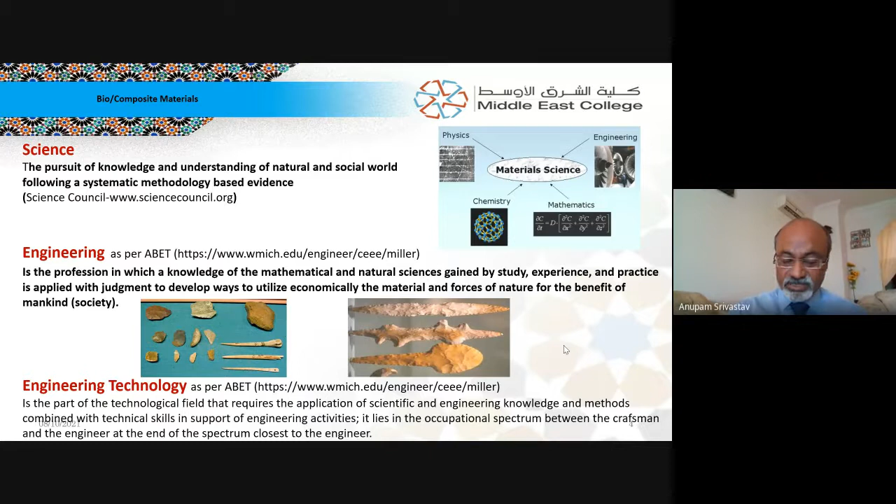So what makes us distinct from other disciplines of engineering, particularly the new ones, is that for us, science is as important as for them, but for us, our own skills are important. So if we just know the theory, we are excellent mathematicians, modelers, but if we don't have the skill, the art, then we are failing as engineers. So with this caution, let's move and see what is the material world.

So we are all knowing, all of you are teaching, and some of you are quite senior, so I don't have to elaborate on this, but just broadly classifying the materials as metals and non-metals, and then various categories among metals as pure metals, alloys, and in non-metals, inorganic and organic, and then combination of each of them, which brings us to the current area of novel materials, which are specially fashioned or designed materials. Composites are one of the examples of that.

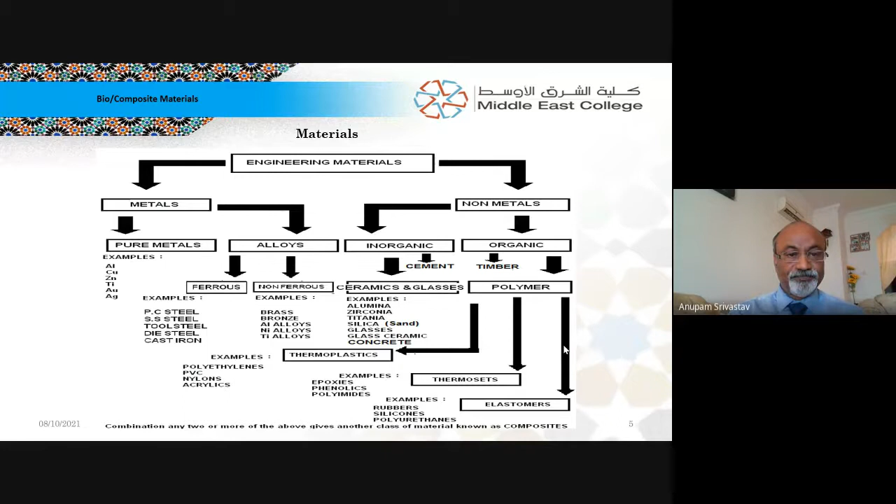So what is the novelty in materials? What is this novel material? As you all know, materials have been so important over a period of time; since humankind stepped on this earth, the importance of material was felt, and the eras of our civilizations have been named on metals. All of us know the Stone Age, where the material used was the stone.

Bronze Age, primarily the bronze category of materials was used, and then the Iron Age, which really transformed human civilization. Steels are part of that, but now even that has gone, and the current times we are living in is the age of silicon. All the electronic devices, solar cells, whatever you think of has something to do with silicon. And to a certain extent, it is either taken over by polymers or going side by side. So we can call it a polymer age, silicon age, or dual age of polymer and silicon.

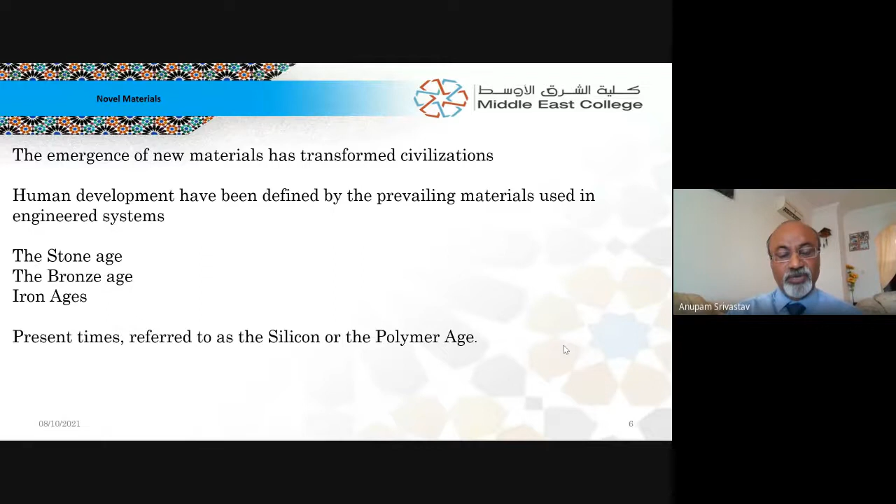So when we see the novel materials, understanding the structure and composition as well as the properties has led to remarkable progress in the area of material science, where properties of materials such as strength-to-density ratio, corrosion, or heat resistance have resulted in a variety of new products. Some of you might have experienced it personally. Some of you might have heard it from your relatives, neighbors, known people.

Orthopedic devices, for example, implants, total hip replacement. Now we can replace the entire hip of the human body with artificial material. Dental is very common. In fact, India is known for dental implants since ages. Cardiac materials, pacemakers, stents, etc. Heat shields of all varieties, all kinds, including in electronic devices as well as on spaceships. Then some of the health and safety instruments like helmets, some of the games and related.

Earlier, the material used for a cricket bat was not that advanced, and that's why scoring a century in a one day game was unthinkable. Now people are scoring 100 in 20 over games. They are scoring 200, 300. All the credit goes to these novel materials or the way those materials are shaped. Tennis rackets are also one example of that.

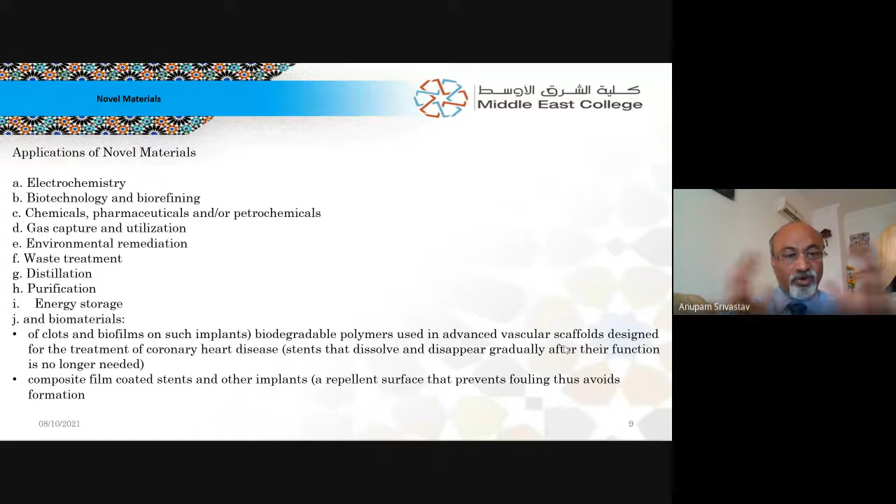So it's a broader family of materials, under which you have heard about smart materials, you would have heard about functional materials, shape memory alloys, etc. All that comes under this broader category of novel materials.

So coming to the topic of biomaterials, as the name indicates, it's a material which is developed or which is being used as a non-viable material in medical devices which are intended to interact with biological systems for the purpose of improving human health. What does that mean? It means any material which is having some strength and which is to supplement the existing structural or other elements

of the human body. So medicines which we consume, technically speaking, don't come under biomaterials, although they go inside the human body, but they are not intended to supplement any existing organ or other skeletal functions. So that's why the drugs used for medicine are not classified or categorized under biomaterials. It is more to do with mechanical, heat, flow related applications in the human body.

So because of that, the non-viable word has been removed now, because non-viable means without which we can't do anything. So this change in the new definition has come because tissue engineered scaffolds and hybrid prosthetics have been developed, in which living cells are combined with non-organic material.

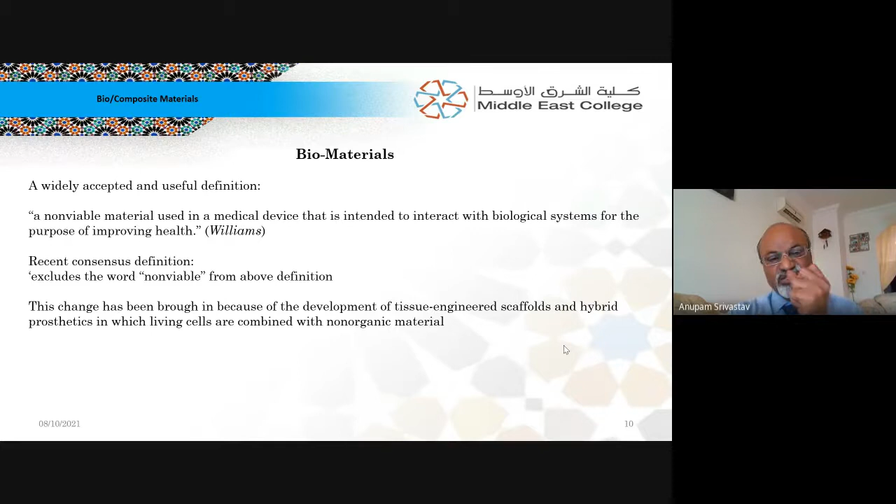Earlier scaffolds had to be removed, but now they are made so close to the human body in terms of characteristics and chemical structure that even if they are retained there, the body accepts it as original. Sometimes it dissolves it, sometimes just leaves it there, knowing that it is not going to harm. So that is how biomaterials have progressed.

So finally, what has led to all these developments is the refinement in the definition itself, which is a material intended to interface with the biological system to evaluate, treat, augment, or replace any tissue, organ, or function of the body. So a complete liver can be replaced, a complete heart is replaced by an artificial heart. So the material which is used for that artificial heart is a biomaterial.

Or a bone has fractured and a material is put there to augment the strength of the bone or support the bone, and it is removed once the bone is healed; that is also a biomaterial. So there are non-viable biomaterials and viable biomaterials. How do we classify the biomaterials?

Since it is going inside the body, and from some of the hints I've given on how it behaves with the human system, they can be biotolerant. That means they're not very close to the physiological conditions of the body. They are not toxic as such, but the body just tolerates them. So in such a case, what happens? The implants get separated from the adjacent area, generally in the case of bone, by a soft tissue layer along most of the interface.

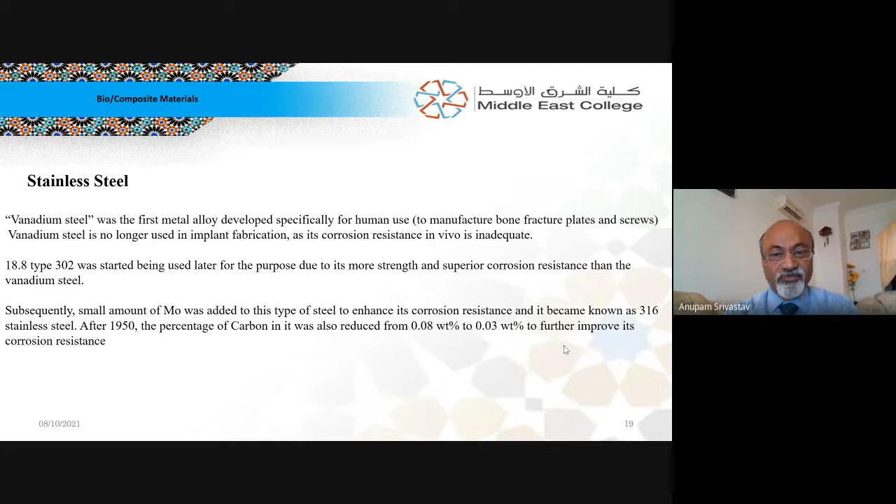Still, it needed further novelty, further improvement in properties, and therefore 316L stainless steel was finally developed, which had some more alloying elements. Now, currently, what is in use in market since 1950s is 316L stainless steel, which has carbon percentage only up to 0.03%. Manganese is 2%. Phosphorus is again similar to carbon, and so on.

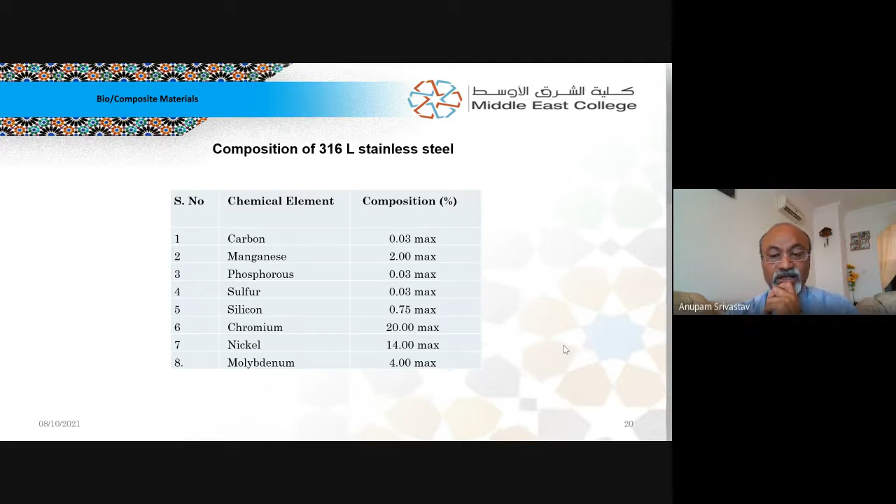If you see, the highest is chromium, and the next is nickel. So nickel and chromium are dominant alloying elements, whereas molybdenum and manganese are minor alloying elements, and rest all are trace alloying elements. So what is advantage of 316L stainless steel compared to the previous two generations of this steel is that it has quite high mechanical property strength. As you can see, I need not explain.

But since time is not there, I'm not going to go for question answer session as such now, but I'm posing a question. Do you think that high strength is good or low strength is good? So here, this 316L stainless steel has approximately 10 times more strength, Young's modulus, than bone, for which it is going to be implanted. So it is going to be implanted to support the bone. And the strength of this material is very, very high, 10 times higher.

So what happens then? It happens what we do for the school, our children, or in the colleges when we teach. If we support the student too much, spoon feeding too much, that student gets dependent on the teacher, or that child gets dependent on the parent. Same thing happens in the human body. If the bone gets supported too much, then it forgets to carry the load. And with time, bone resorption happens. Bone starts losing its load carrying capacity because it starts discarding the calcium present in the bone.

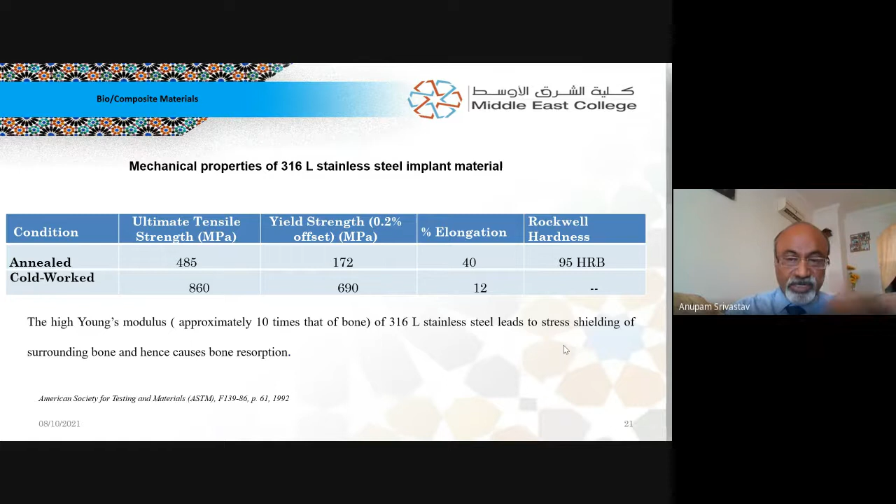Second broader category is titanium alloys. They are being used from quite long time, as it is seen here, 1930s onwards. They are used because they are lightweight compared to the steels, and they have very good mechanico-chemical properties. So that means mechanical properties are also very good, and chemical properties, particularly the corrosion resistance and biotoxicity, etc., is quite good. And there are variety of categories of titanium alloys.

Generally 4 grades are there: unalloyed pure titanium, and then various impurities or alloying elements are added, which are used for all surgical purposes. The amount of oxygen in particular affects the ductility. So if we increase the amount, ductility goes down. If we decrease it, ductility goes up. So depending upon what is the type of application, we increase or decrease the amount of oxygen also here, which was not the case in case of 316L stainless steel.

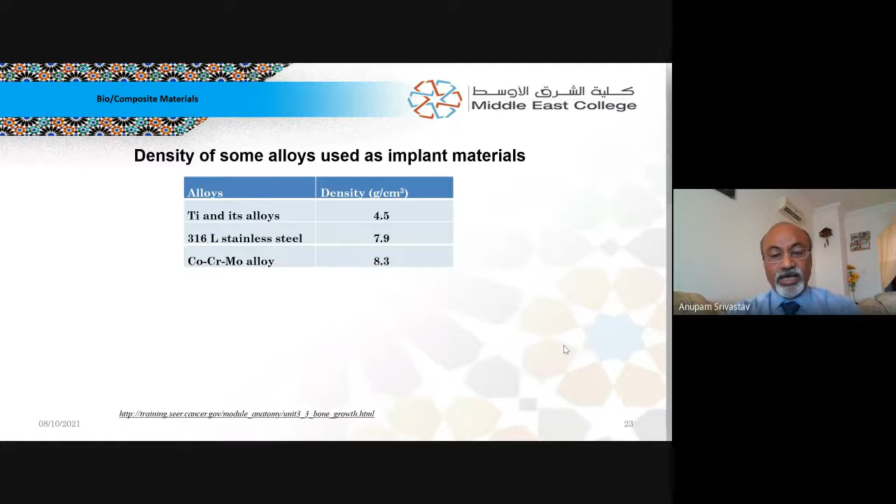And you again see the properties. Again, it is quite high. If you compare with steel, which was 7.9 density wise, it is quite lightweight. And then if you compare other properties also, you will find that it is more suitable for majority of applications compared to the other 2 categories.

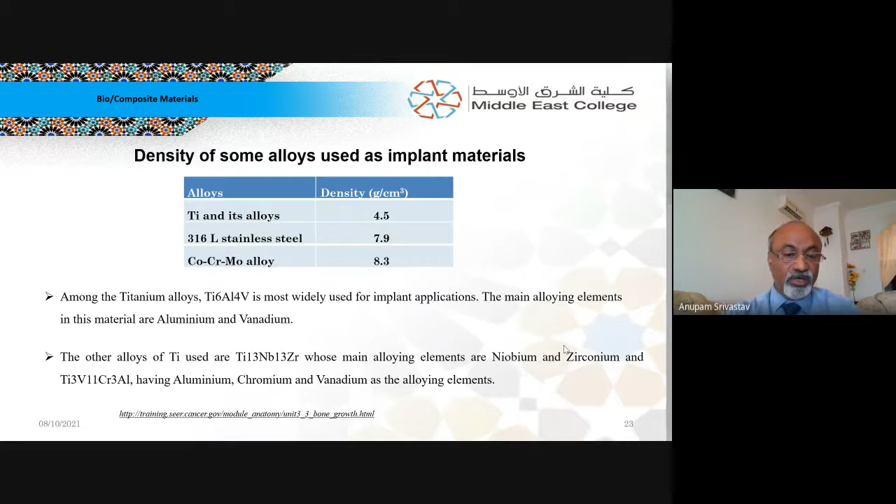And uses, as I said, are quite varied depending upon which alloying element is being used. Niobium, zirconium, aluminium, chromium, etc. are used, and different categories or families of titanium alloys are prepared to be used as implant material. These are some of the alloying elements, and with that alloying element, the grades are made. And the most commonly used one is the last one, Ti6Al4V alloy. More than 90% of titanium alloy used in current times is of this category, which is in the last column.

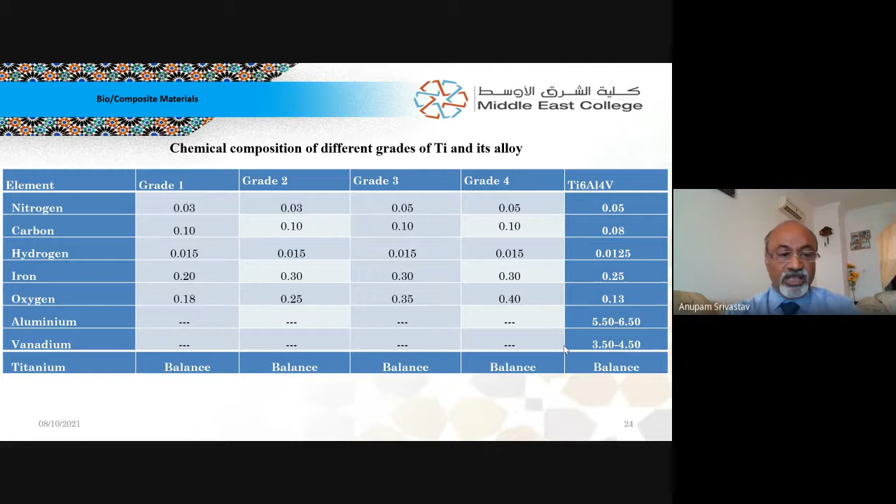Mechanical properties, as I was mentioning, again, it has very good mechanical properties, and it depends where it is going to be used. So sometimes these very high mechanical properties are useful, and sometimes they are not useful.

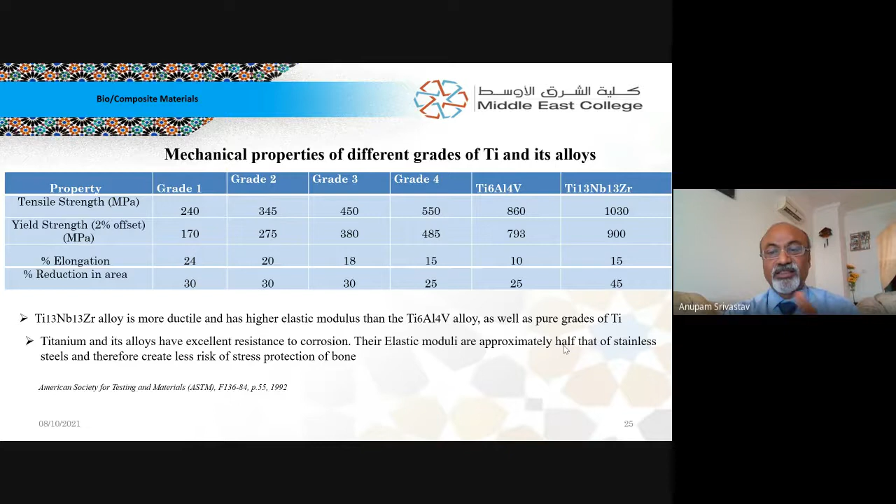Okay. Just a point that titanium and its alloys have excellent resistance, as I mentioned. Their elastic moduli are approximately half of the stainless steel and therefore create less risk of stress protection in bone. What I was mentioning in 316L stainless steel, that it has higher modulus and therefore it actually spoils the bone. Whereas here it has half of stainless steel, so it spoils but spoils lesser. So the novelty in this category is that it is supporting the bone more compared to the stainless steel.

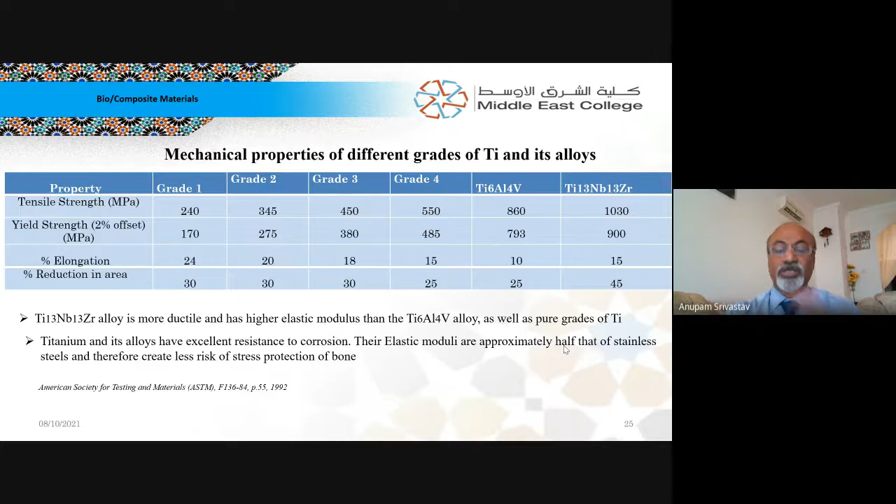And then comes the cobalt chromium category. I'll not go into detail. It has variety, but primarily there are two categories. One is the castable one, and the other one is the forged category. And based on whether it is cast or forged, where it is going to be used is decided, because if the shape of that implant is very, very intricate, then casting is preferred. But if the shape is straightforward like a bone plate, etc., then it can be forged. As you all know, in mechanical engineering, how do we decide which manufacturing method has to be used?

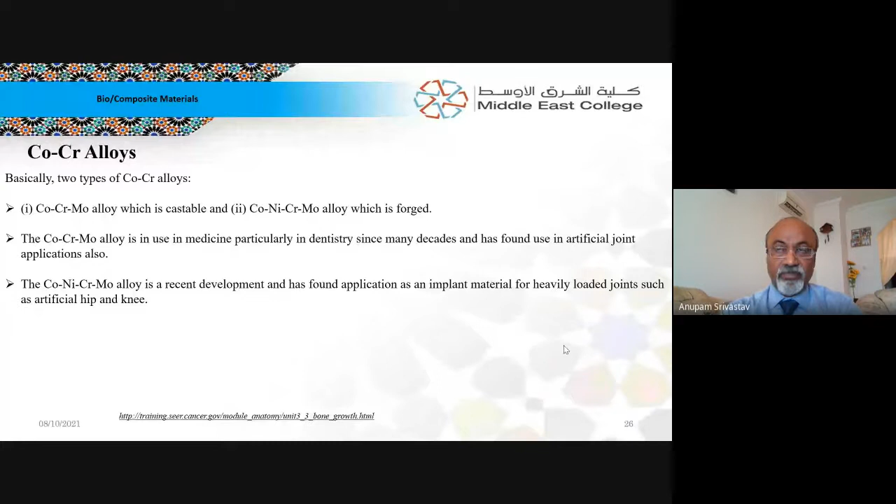And it is primarily initially used in dentistry, but now is also being used in artificial joints. So total hip replacement, total knee replacement, etc. And it is being used because it can carry the load. And the artificial hip is the main area where most of the load of the human body is being shared, so it is being used even there.

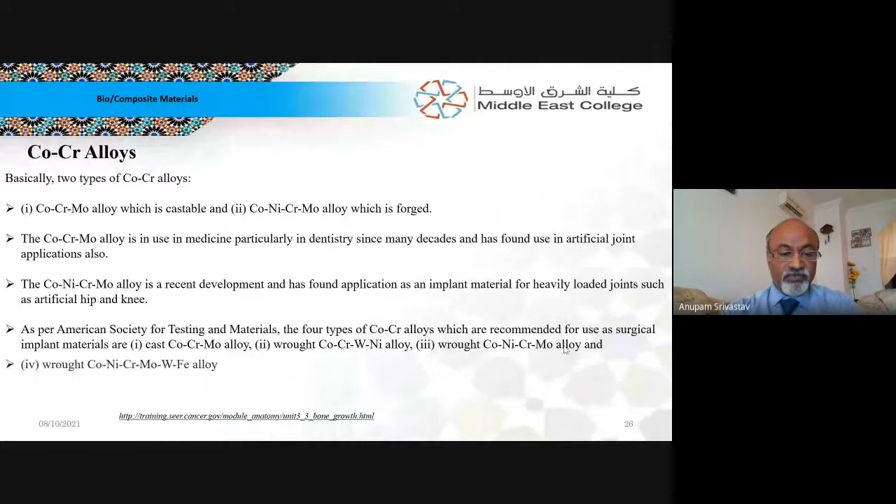And coming back to the corrosion resistance, as I had shown earlier, it has the highest corrosion resistance compared to all the three. And even among the cobalt chromium, the two categories, the one which has nickel in it has higher corrosion resistance, and that's why one of them is not preferred over the other. In general, wherever there is friction or where two parts are to move, it is not preferred, such as the bearing areas, because frictional properties are not very good.

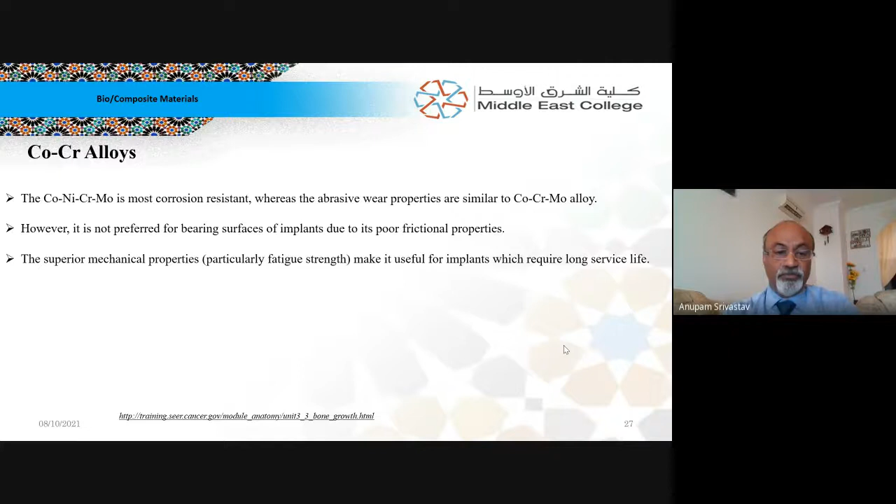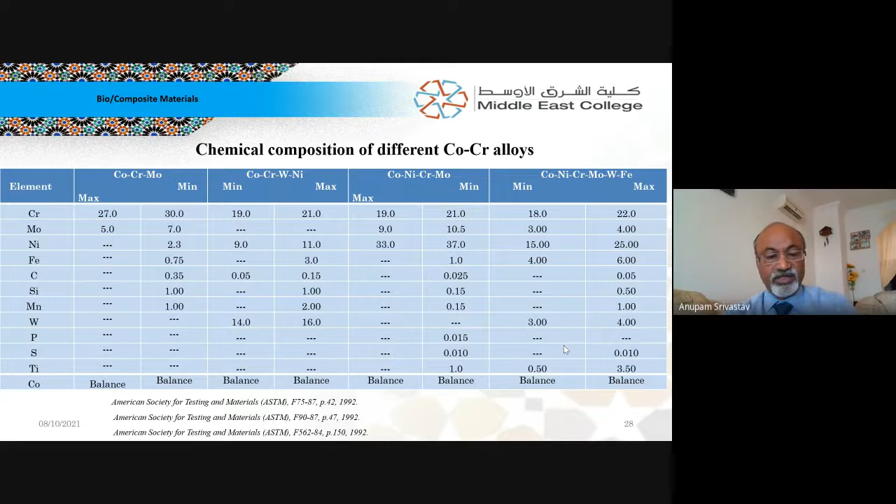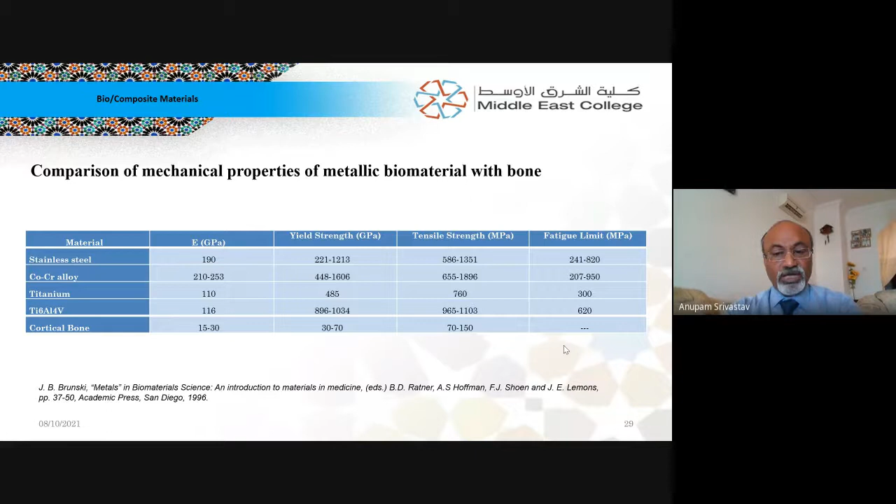Just for your brief look, these are the alloying elements, and based on their alloying elements, the various categories are decided. So if we see the comparison between stainless steel, cobalt chromium, titanium pure and titanium alloy and the bone, you can see the bone yield strength is 30 to 70 gigapascal, whereas all these materials are 4 times, 5 times, 6 times higher. Modulus of elasticity also is in the same range, tensile strength in the same range, fatigue limit also the same range. So which one to be selected among these metallic materials all depends on where exactly we are going to use it, and if that purpose is to be served for a long time or a short period. So this is already mentioned.

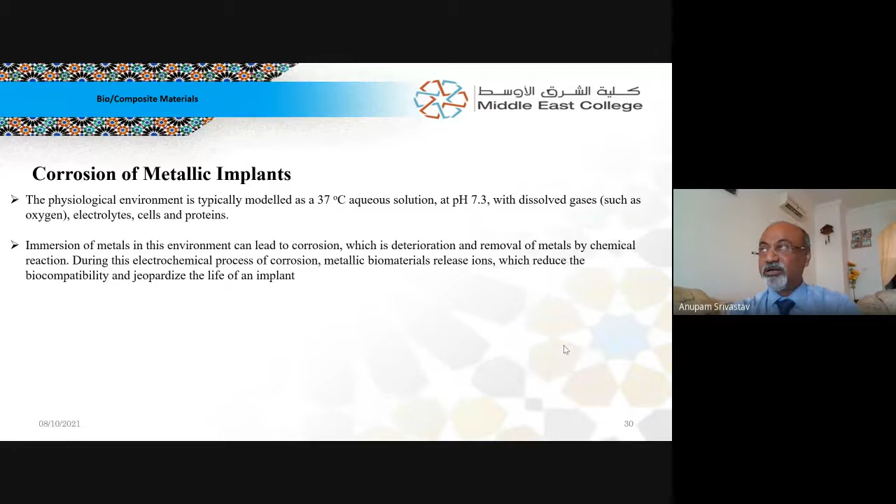Just to let you know the pH value, the human body pH value is 7.3. We cannot play with this. Temperature we still can manage, but if the pH value goes up and down, it has a catastrophic effect on all the organs in the body. So when the implants are implanted in the body, we have to know that it has not only this pH and the temperature, the body also has dissolved gases, and then it should not let the formation of an electrolytic cell, electric cell formation, and playing with the protein of the body.

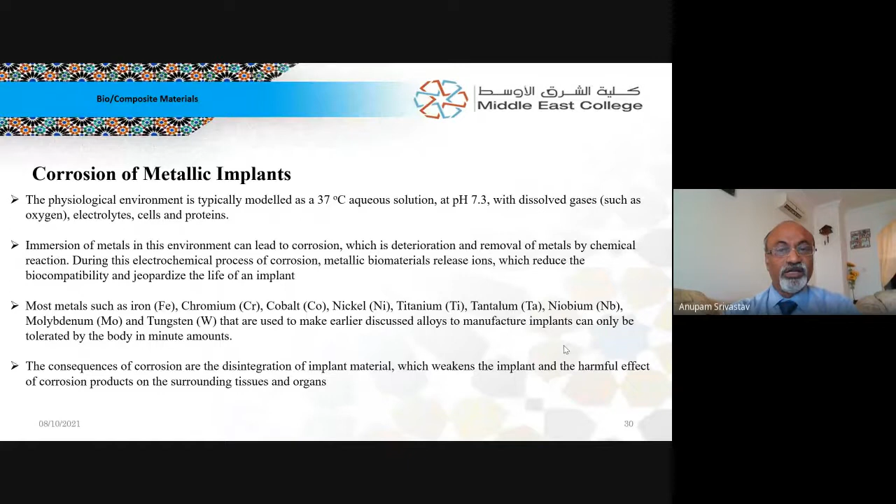So with these problems in general, load bearing problems, corrosion problems, cost, fabrication, etc., that is why it was thought that let us look at some other category of materials, and that was the time when we thought of further novelty in the biomaterial. Just to give you a glimpse of what happens when a metal is implanted, this is based on my own research. This was implanted in an accident case where bone was fractured in multiple places.

And what would have happened to the corrosion product? The corrosion product is more toxic than the parent material, and it would have gone in the surrounding tissues, and it would have created adverse reaction, itching, swelling, and sometimes loosening also. And then it had to be removed.

So this was removed by the doctor, and we had investigated what was the cause of removal, why this implant failed in this patient. It was this: for this particular patient, it was not acceptable by the body, and that's why it reacted earlier than in normal other patients.

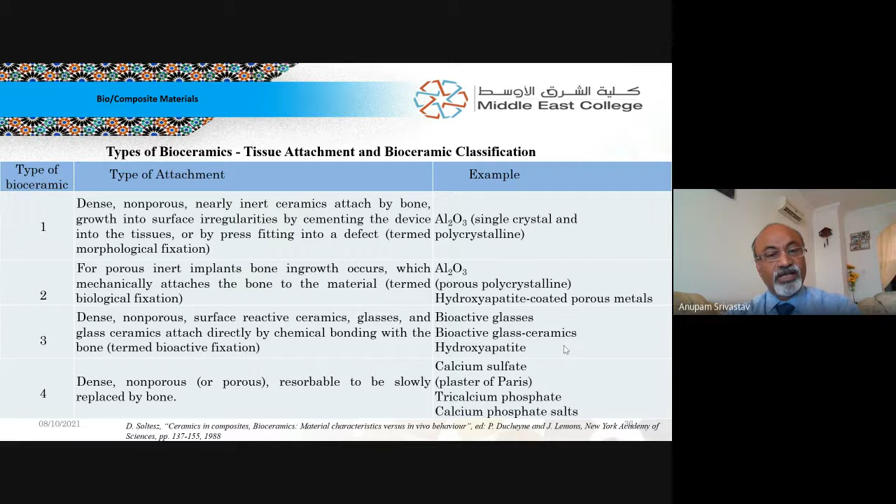You must have heard about plaster of Paris, which is used for external support to the bone damage, means fractures. That's also a category of bioceramic, which is used externally. In certain cases, it is also used for short duration inside as well. So this is how types of biomaterial, bioceramics are categorized, and their different attachment mechanisms are listed here.

Let's go to the main category. So among all bioceramics, the largest group of bioceramics are calcium phosphate group of bioceramics. Why? Because they are calcium based, and our bone is calcium based, and they are as close as possible among all category to the human bone. So because they are close to the human bone in all sense, therefore they are the most acceptable part.

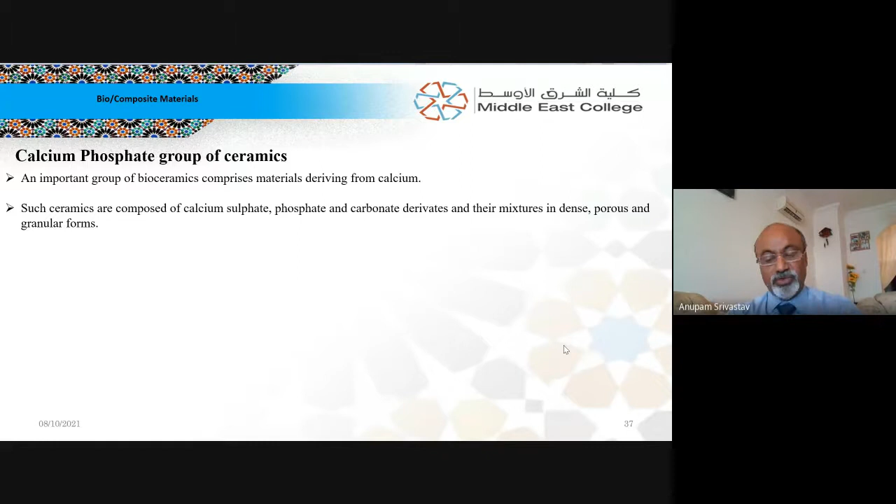They do lack mechanical strength though, so they cannot be used as such in applications where you have shock loading. So they cannot be used as a raw form of bioceramic for, say, total hip replacement, because if hip is totally made of ceramic and we fall, then it will shatter into pieces rather than having a fracture here and there. So we must do something to bring novelty to this category of material, and we'll see how it is done. So we'll see some of those things for calcium phosphate.

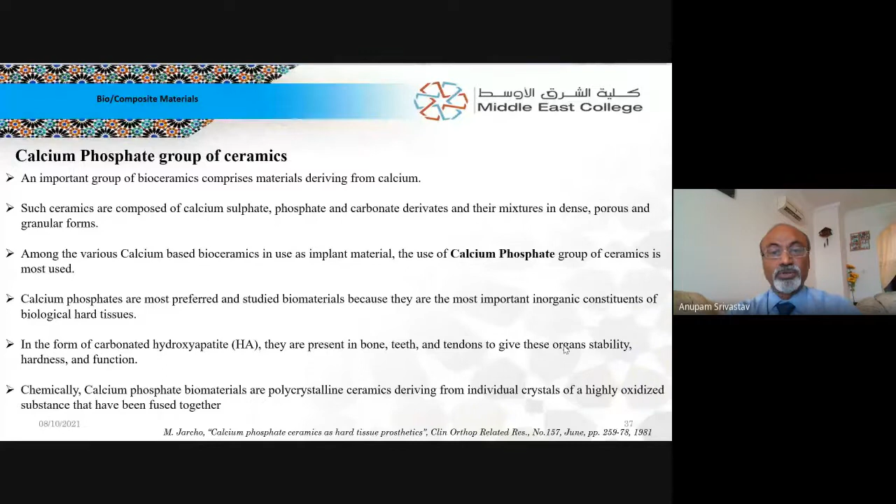One of the most important categories of that is hydroxyapatite. Hydroxyapatite is nothing but a polycrystalline ceramic which is derived from natural sources. It is artificially made, as well as derived from animal sources, bone crushing. The upper side, the harder part of the bone, is hydroxyapatite, or tooth enamel. It is very close to hydroxyapatite.

So this calcium phosphate is, as I said, biocompatible. That means they are totally accepted by the body, or bioresorbable. That means they are inside the body, and when the purpose is served, they are absorbed by the body, and extra material is excreted out from the body. So there is nothing better than this. If any material can be resorbable, that is the novelty we are looking for.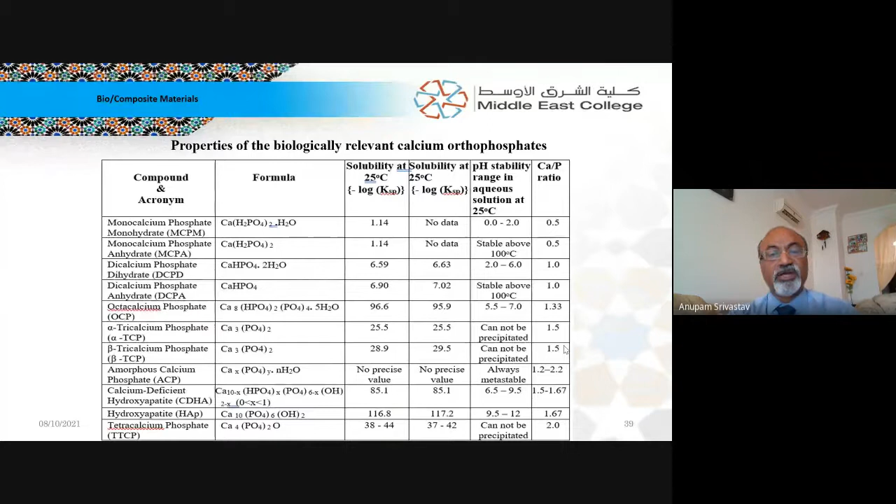That is again going into detail, I'm not talking about it. What is more important is the last column, which is Ca/P ratio. The Ca/P ratio should be high. As you can see, 1.67 is for hydroxyapatite. The higher the Ca/P ratio, the more stable it will be in the human body. And that is why the lower category 1.67 is quite acceptable to the body, because it doesn't dissolve without serving the purpose, and it is quite acceptable to other environments as well.

This is the formula I've already said. So either you call it pentacalcium or decacalcium: Ca5(PO4)3OH, or Ca10(PO4)6(OH)2. Those of you who are from chemistry or have more chemistry knowledge than a mechanical engineer know the difference between Ca10(PO4)6(OH)2 and Ca5(PO4)3OH.

So it is stable at pH values greater than 4.2 at temperatures of 37 degrees. At lower than 4.2, it dissolves or disintegrates into dicalcium phosphate, or what is called brushite, which is also stable, but this transition is not acceptable to the body in general. So we prefer not to use it as such. That is why we do some changes.

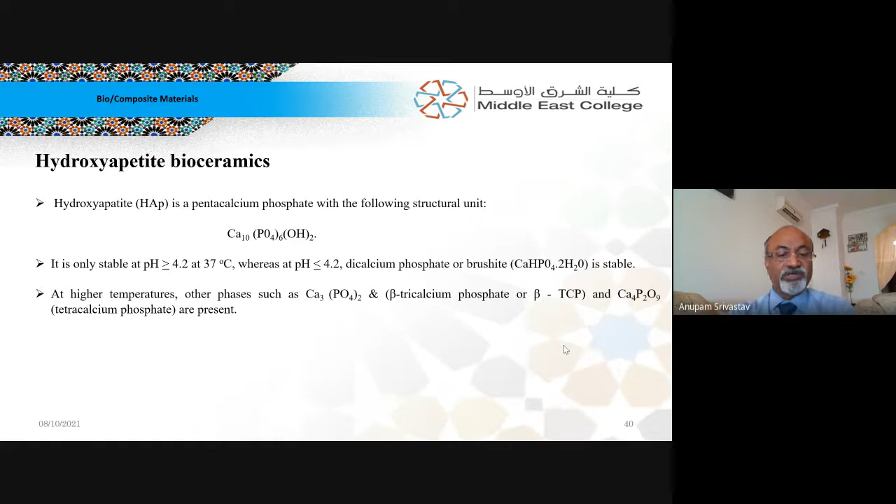At higher temperature, there is a phase change, and it converts into tricalcium phosphate, beta form, and tetracalcium phosphate, etc. I'll show you some of my experiments where it has been shown that way. This is how it reacts when it contacts the human body. Human body has water, so when it comes in contact, this way, right side to left or left side to right, you can see dissolution happening and release of calcium ions taking place.

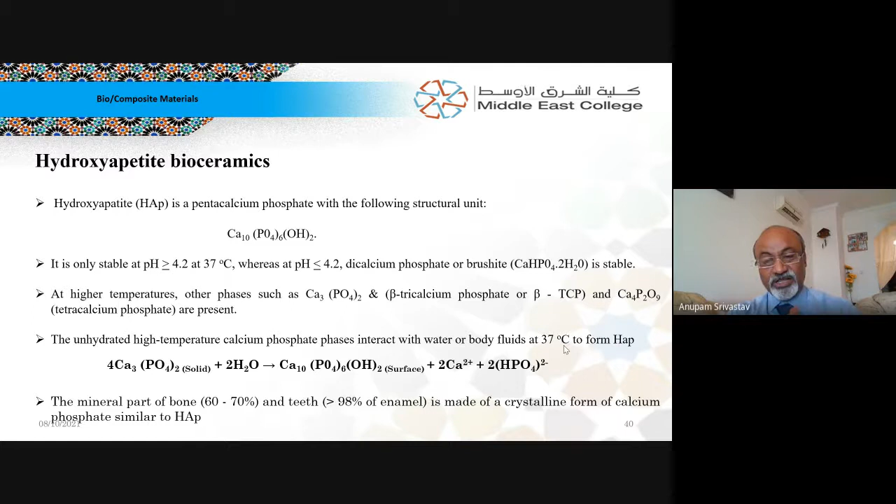So what is this material? Just to let you know, bone contains 60 to 70% of this material, whereas teeth contain more than 98%. And that's why this category is most acceptable or most native to the human body compared to any other category. So novelty in this material is it is as close as natural material of the body.

And then going to alumina, Al2O3, it is very inert, used in a variety of applications in the mechanical engineering discipline, as well as now being used in this. I'm not going into detail. You all know where it is used. They are used in spark plugs, tap washers, pump seals, electronic substrates on which we deposit the silicon devices, grinding media, abrasion resistance tiles, cutting tools, and what I'm talking about is bioceramic.

Why was bioceramic used in the first place? Because it has very high compressive strength. It's quite brittle. It is ceramics. So ceramics in general have higher compressive strength compared to tensile strength. It has very high hardness, and that is why it is used as abrasive media or grinding media. It is very stable up to high temperature, even to chemicals, has high thermal conductivity, is resistant to thermal shocks, and has a high degree of refractoriness. That's why refractory linings of kilns or furnaces are made using alumina.

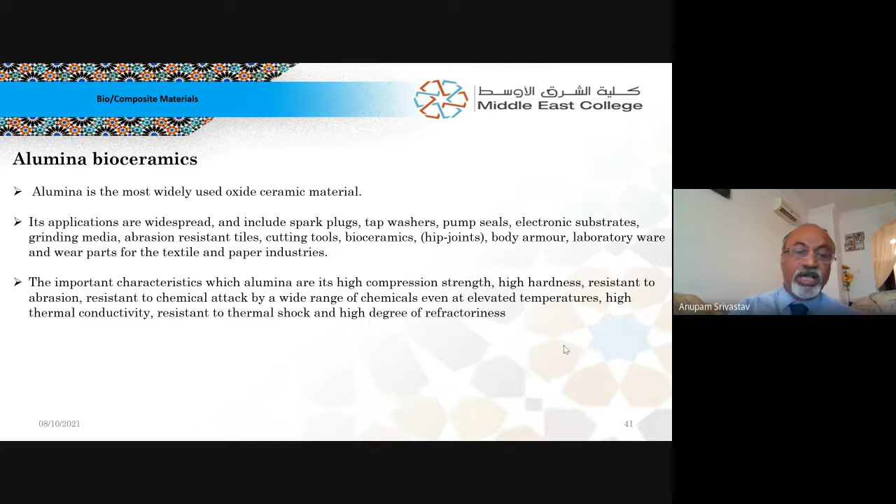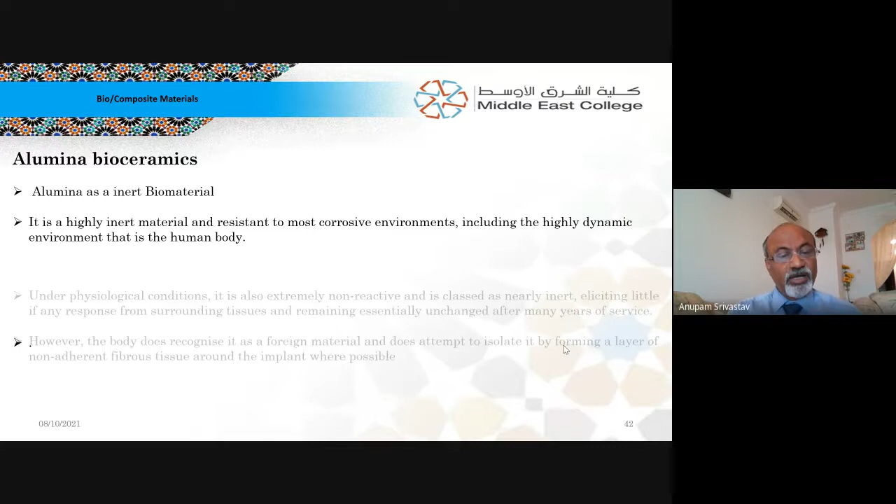So because it is inert, it is treated by the body as a foreign material. But because it is inert, it doesn't do any harm to the body. The body just puts a membrane or a capsule around it and leaves it there. So that is the only drawback of this. A fibrous tissue is formed along the surface.

So then what mechanical engineers can do, and they have done, is they have come up with the idea of a composite hydroxyapatite bioceramic. Hydroxyapatite is the closest material humankind has known which is connected to the human system, and it has some deficiencies. In any case, we all know that composite materials are the category of material which combine the good properties of two or more categories of material.

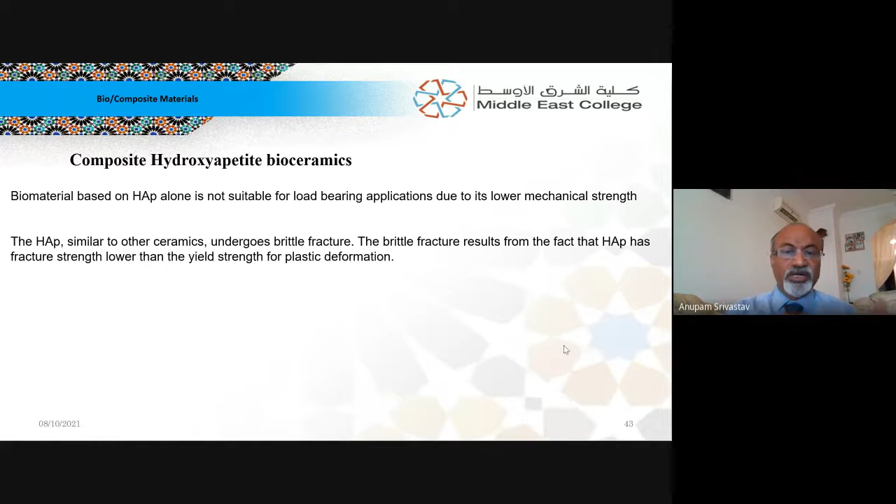So the obvious option to bring novelty is to use hydroxyapatite as the bulk, and use the other phase as whichever is required. So it can be a ceramic hydroxyapatite composite. Metals also can be, fibrous also, layered. Many classes of composite hydroxyapatite can be used. What we are talking about is particle hydroxyapatite composite. If that is done, then we are going to reduce some of the discrepancies of ceramics, which is the brittle nature, which is explained by the Griffith theory.

In brittle material, there is a pre-existing crack, which always happens because the fabrication of ceramics is done by a process called sintering, heating it. And sintering is a unique process because in normal material, when we heat, it expands. Whereas in sintering, which is done for ceramics, when you heat, it contracts. Whatever was the original raw size or green size, when you heat it, the size reduces, which you might have seen in the case of bricks.

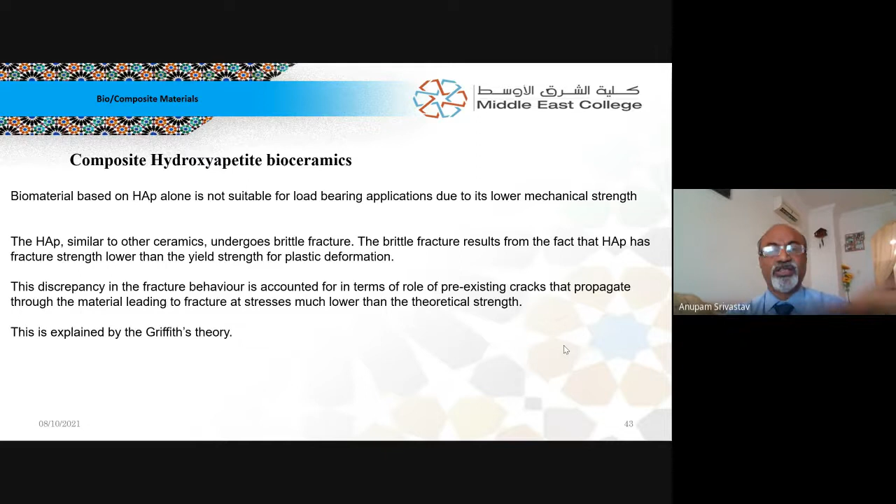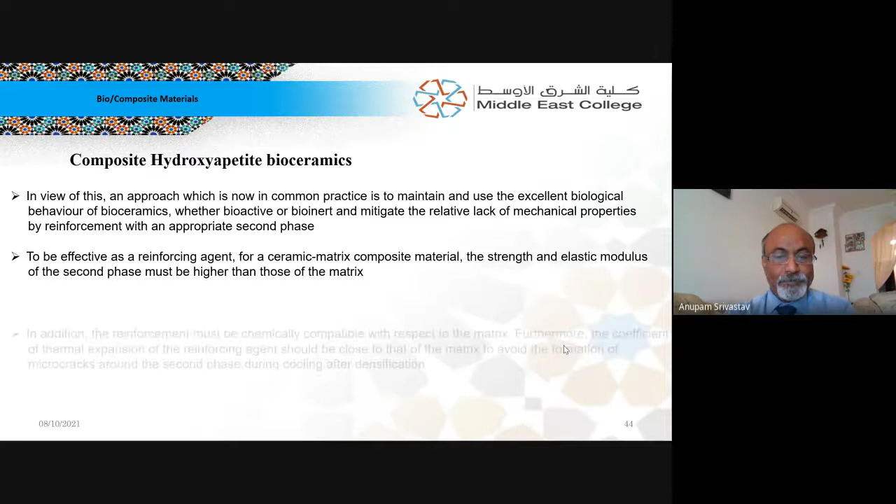So we have a variety of ceramics or metals which can be combined with hydroxyapatite. The most common one is alumina. Alumina is used as a second phase reinforcement in a brittle hydroxyapatite matrix, and then it is sintered and made into the product. Just moving on.

Other composite-forming second phase materials are also there, which are polymeric in nature. So again, a matrix of hydroxyapatite with polymers like polyethylene, polymethyl methacrylate (PMMA), and polylactide-co-glycolide (PLG). All these are very commonly used materials in mechanical engineering. Chemically they're long names, but along with that, some metals like titanium and zirconium are also used, and the most common ones are Al2O3, ZrO2 and bioglass.

So depending on what kind of strength we have to bring in, we can improve the brittleness by increasing the fracture strength, thereby bringing all good properties. The rest of the properties are anyway there. They are lightweight, they are inert, they have no adverse body reaction. They can be easily formed into various intricate shapes, but the fracture strength was less. That can be improved by second phase inclusion of particles. Even whiskers or fibers can be added, depending on which kind of strength we are looking for.

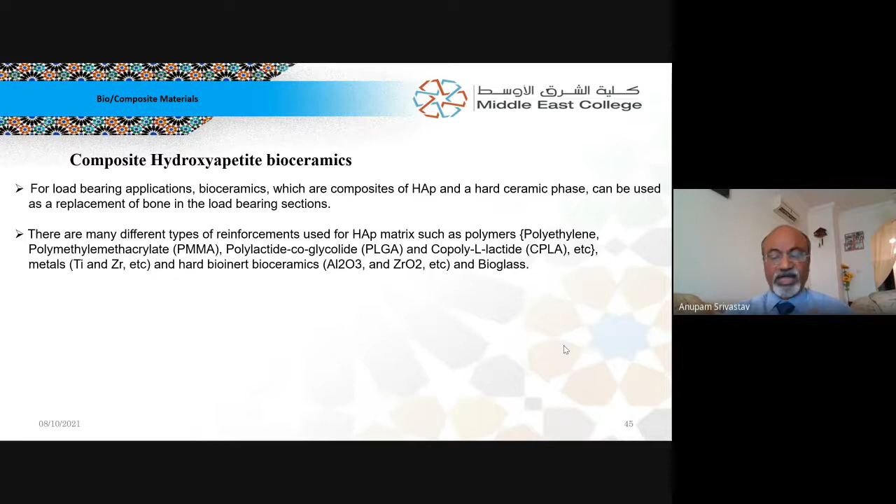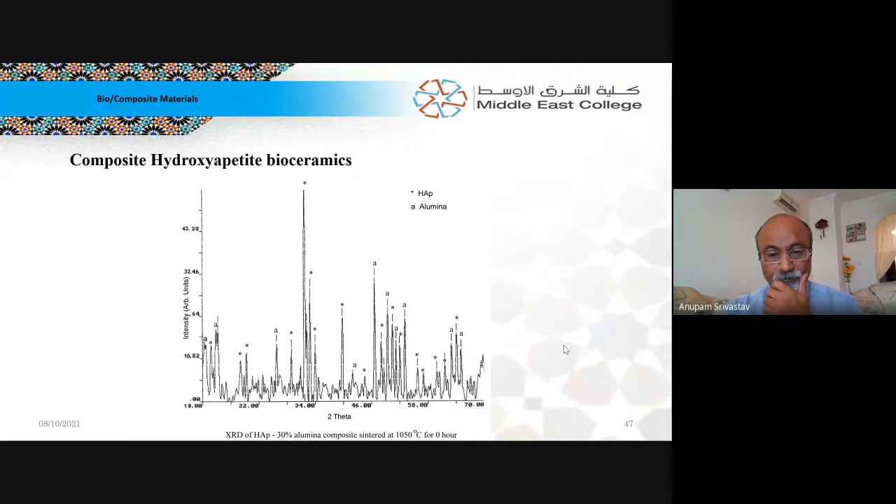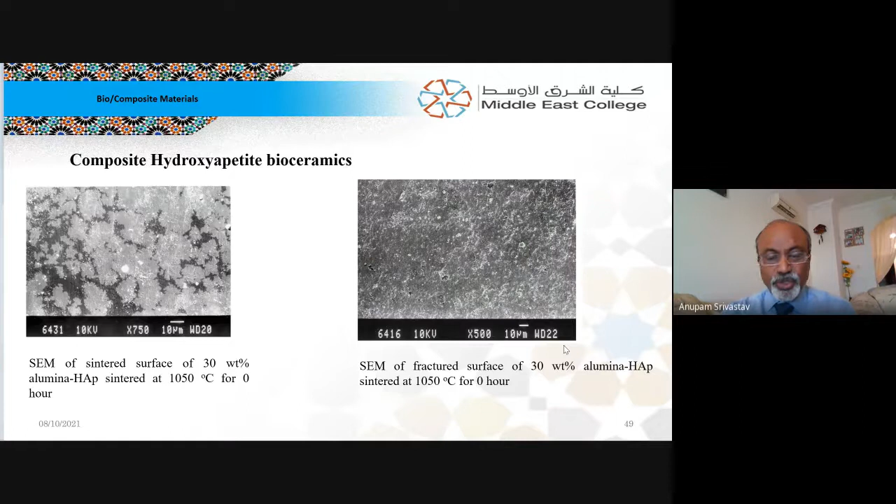And then we characterize hydroxyapatite for mechanical strength. We see the internal structures using electron microscopy, to see how strong or how dense the structures formed are. As you can see on the right hand side, there are some visible micropores. When subjected to tensile stresses, these pores join together and make the material fail by a brittle failure mechanism.

At higher magnification we can see these pores. The left-hand side pores are not desirable because they are not big enough; they won't allow growth of tissue, veins and nerves. Whereas on the right-hand side, it has been intentionally created so that pores are available, with a size good enough to allow at least a minute level of growth, and that will make the implant stronger and serve longer.

So with this, we see what the future directions are in novel materials. We have seen all this growth. It is still growing.

So there is something which we can do in remodeling of the material, regeneration area of the material. That means naturally occurring biocompatible materials are used as scaffold. Some of the material which is available in nature, chitosan, collagen, they're used for wound healing and tissue regeneration. You must have heard that now materials are coming, you just put it on the wound and then the wound heals. So this is one area of novelty which is coming up in biomaterials.

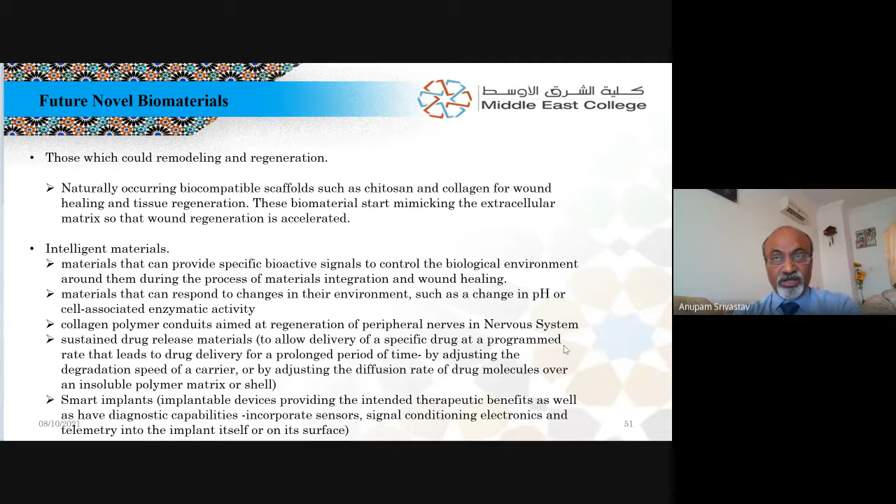Then these materials, why are they novel? Because they mimic the extracellular matrix. Whatever is the skin, below skin area, the tissue, these materials are so close that the body recognizes them as their own. They mimic the body, and that is why they help in wound regeneration.

Then another category of materials is what we call smart material or intelligent material, the material that can provide specific bioactive signals to control the biological environment around them during the process of material integration and wound healing. They release either chemicals or electrical signals, and that helps the body to heal.

Material that can respond to changes in the environment, such as the moment pH value changes, then these materials behave a particular way, or they give a particular work to the body only when enzyme is secreted. And you know many such examples. I don't have to go, but it is coming up. It's still a working area.

Then collagen polymer combination, which I was talking about just before, that they are composites. They work as a conduit for regeneration of peripheral nerves. So when nerve systems get damaged, spinal system gets damaged, these collagen polymer conduits are injected there, through which this nervous system regrows. So these are some of the novelties which are being worked on. Still work is on, but currently they are in development and use.

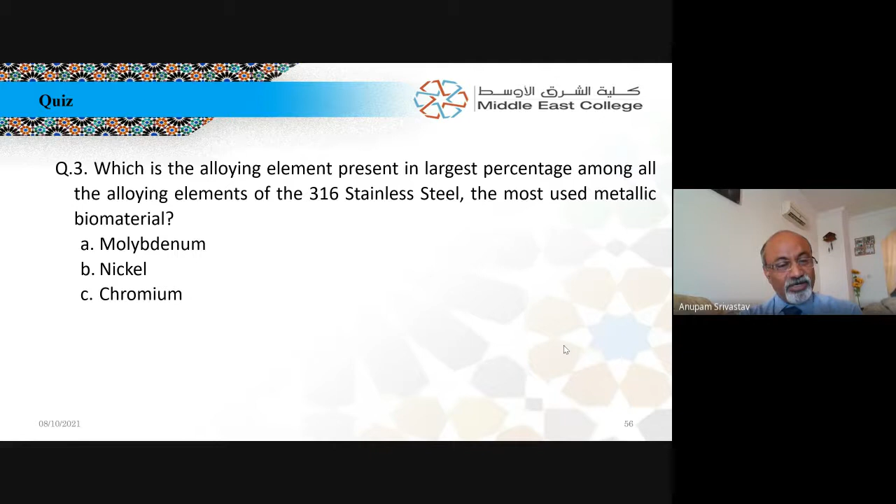Which of the alloying elements is present in the largest percentage among all alloying elements of 316 stainless steel? I had emphasized that while I was presenting. Is it molybdenum, nickel, or chromium? Chromium. Good answer. I don't know whether it is correct or not. Let us see from one or two more. I think all the others are agreeing with you or disagreeing. In that case, only silence is there. So let us agree with you and say that it is chromium. Thank you for the correct answer.

Hydroxyapatite belongs to the family of hydrocarbons, calcium phosphates, or hydrochlorides. Hydroxyapatite, HAP, belongs to the family of hydrocarbons, calcium phosphates, or hydrochlorides. No answers? Calcium phosphates. Thank you for the answer. I don't know whether it is correct or not. Let me hear one more. If another person says it, then I might get a hint whether it is correct or not.

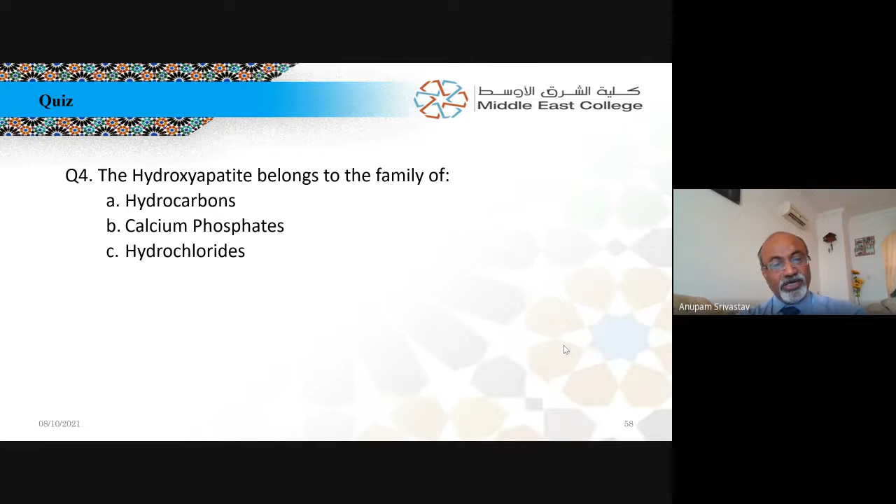Okay, no worries. So let's see the answer. Calcium phosphates, as I said, Ca10(PO4)6(OH)2 I had shown. So it's the calcium phosphate family. This I've already told. So the chemical formula for hydroxyapatite: Ca10(PO4)6(OH)2, Ca3(PO4)2, CaHPO4·2H2O.

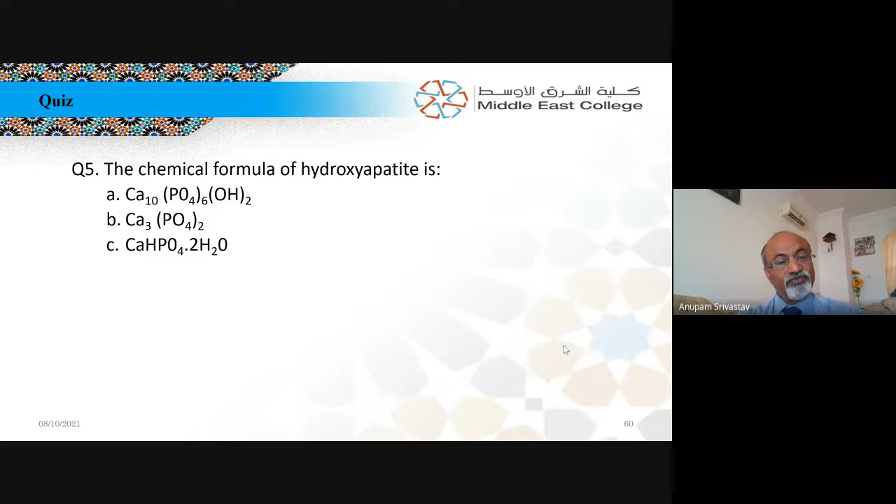So the first one is the answer, which I have already given just before this. Either you call it Ca5(PO4)3OH or Ca10(PO4)6(OH)2. Basically, it is pentacalcium phosphate. So the answer is this, and that brings us to the end of the presentation.